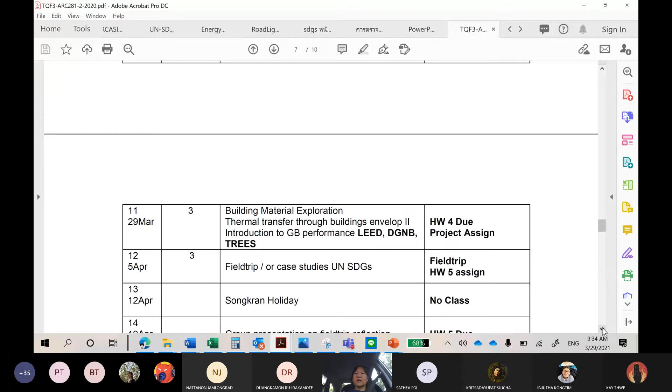Okay, I hope everybody sees my screen. This is the class syllabus for today, March 29. Last week we learned about thermal comfort, thermal performance of building materials, and building properties, as well as thermal transfer through heat gain through the building envelope.

We learned about U value, OTTV, and how it affects building envelope design. We had a quiz last week. I also assigned homework number 4, but the due date is not today. The due date will be April 5th.

Okay, homework 4. I already posted the homework on Microsoft Teams, where everybody is required to attend the webinar on April 3rd, which is your homework number 4. Okay, you have to attend.

The webinar on resilience and sustainable future. You are requested to make a summary as well as give critical reflections, your thoughts on it, what you can use, and your thinking about the webinar and your future. This is homework number 4, which is due on April 5th.

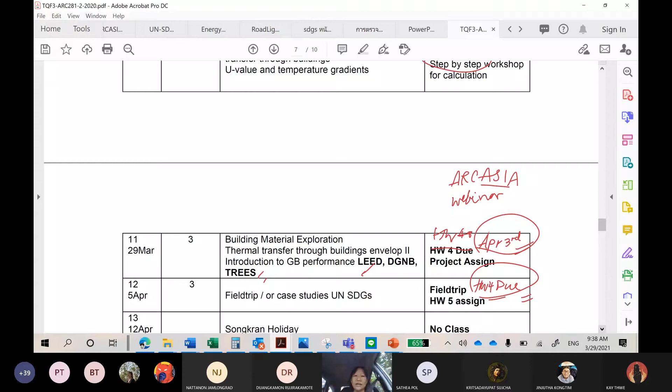Design for function, design for feel and emotion, for aesthetic, as well as design for sustainability and social responsibility.

Okay, first I'm going to have two sets of lecture. The first set is going to be building material, and the second set is going to be about LEED and TREES, where I'll give some case studies so you can see the design approach and the way you can make a presentation.

Okay, hang on just a second. Oh, hello. Excuse me. Sorry, students. Do you still see me? Yes, okay, wait a minute.

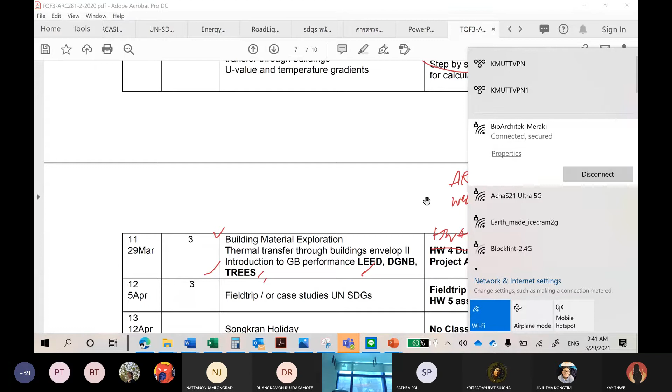All right, building material. I'll show you my lecture. Okay, can everybody see, all right? During my lecture, if you have any questions, please do not hesitate to ask.

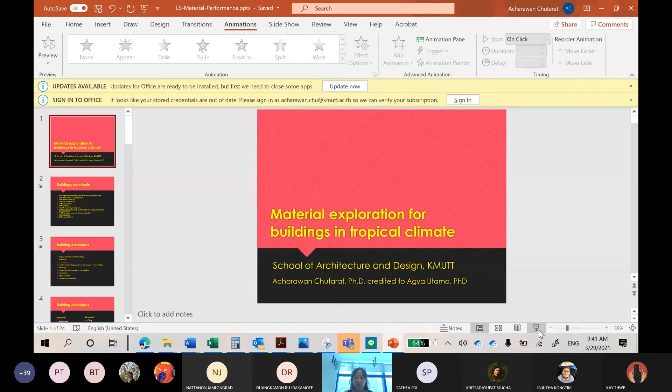Okay, building material for tropical climates. Actually, buildings contribute to the largest raw materials consumers after food production. Every day we have to eat, and that consumes products, and the second is building, because 25% of world's wood harvest is through the building, as well as 20% of fresh water use.

We use water for shower, toilet flush, washing machine, car wash, irrigation for plants. So those take about 20% of fresh water use, and 30% of raw material use, because when we build a building, we have to find the material to make materials for our building envelopes, floors, finishing, ceiling, structural materials—so everything.

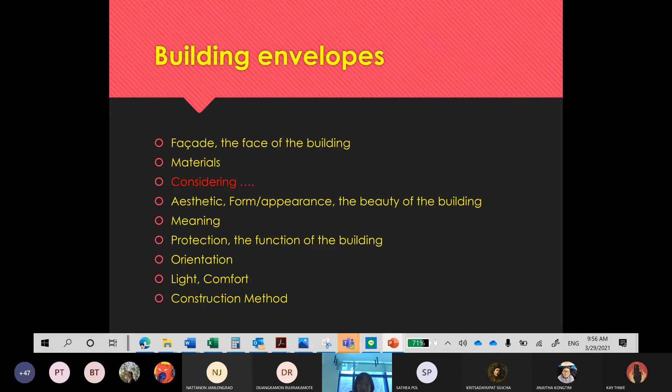So that kind of stuff you have to think about your site and what kind of construction method. Now building envelope - we have to think about what kind of windows, materials, doors, materials, walls, balcony and shade.

Materials can be clay or not. Clay is not good for Nan. Clay may be good for dry climate like Kanchanaburi or Leh, because there's not much rain, and clay or bricks can store the heat onto the... let me sketch this. Clay or thick wall, clay or rammed earth.

Rammed earth is like a layer of mud or brick with layers of cement, and another 10 or 12 centimeter layers of mud or brick, the earth around there, and then you have a kind of layers and press it.

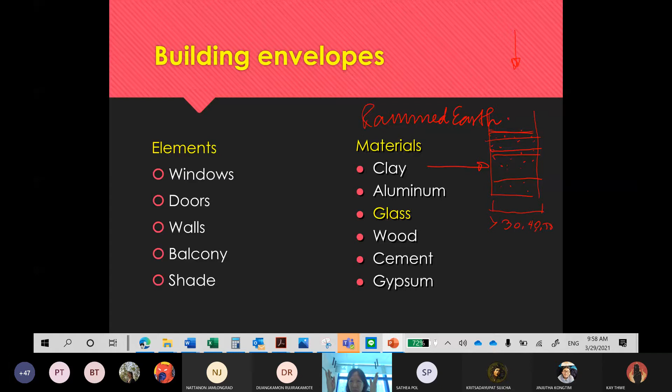That is rammed earth. Basically, rammed earth or clay is like more than 30, 40, 50 centimeters, depends. The thicker the wall is, you can withstand the load like a load bearing, and it can absorb the heat during the daytime. Now the heat comes here and it stores the heat, it delays the heat.

Stores the heat and delays the heat, not to enter into the building. So during the daytime it's cool, when you have a room like a temple or a daytime use, you can use clay or rammed earth.

In dry climate, but why I said it's not good for Nan - because Nan has a lot of rains, and this material absorbs water and sometimes it melts when it rains. And if it doesn't get dried properly, it can have fungus and mold. And when you breathe, it's not so good for your health - very moisture and dirty air, unhealthy air. So that's why I said you need to look at the climate first.

Next is aluminum. Well, aluminum is nice, of course it's durable, it's light, but it looks like a kind of office or a hospital. I don't think it's quite nice for residential or school or somewhere that you need kind of warm and welcome feeling, because the material's property itself is harsh.

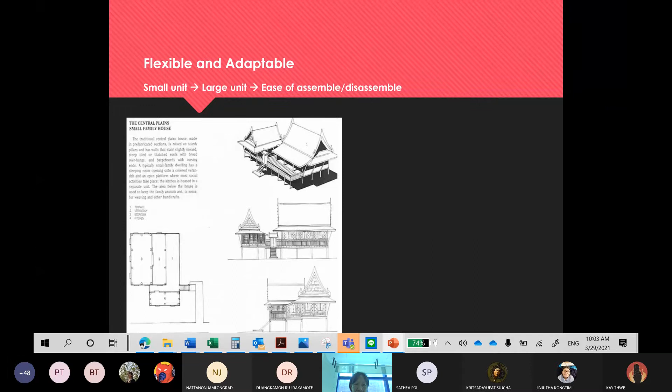So let me take a look at Thai, or our own wisdom. Actually our ancestors were very genius about that. Because why - they could find wood all around, okay, Central Plain, they could cut the wood or bamboo, and then what else?

They can make a design that can grow and is adaptable. For example, if they have only their own unit, number 3, with the sub-terrace and terrace, this is perhaps a kitchen in a separate area. And when they grow, when they have a daughter who gets married, they expand into the big terrace or chan, and they have a kind of connected house. For example, this is the original house, and they can add additional house after additional house. So it's more like a modular design, using the terrace as the connecting and transitional space. Very brilliant design of the living and expanding unit, with a connected system by the chan.

This happened 200 years ago, but I encourage you guys to think about any innovation during our design. Is there any new language?

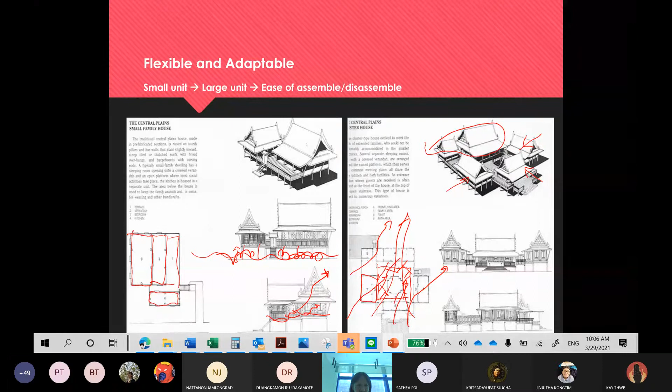So this kind of stuff has been integrated into traditional architecture for more than 300 years. What about our design? Can your design achieve better performance and good aesthetics, utilizing natural resources or passive design?

When they have a long roof, they have what they call kan tuay, a kind of structure in order to hold the roof and protect from the radiation. So you see, this is a very simple and nice innovation.

Let's take a look at the technology. They use what we call a prefabrication technique for each element. Like what? They prefab the column, so one human or two laborers can carry it from a nearby site to put it on the site.

And what about the wall? It's a prefabricated wall system like this. You see, they can make the wall with a light structure, carry it, and then assemble it at the site. It is a light structure. Whether they are on the floodplain or on the hill, they can carry it. There's no steel, no concrete. And with the proper treatment for wood, it can also withstand the termites.

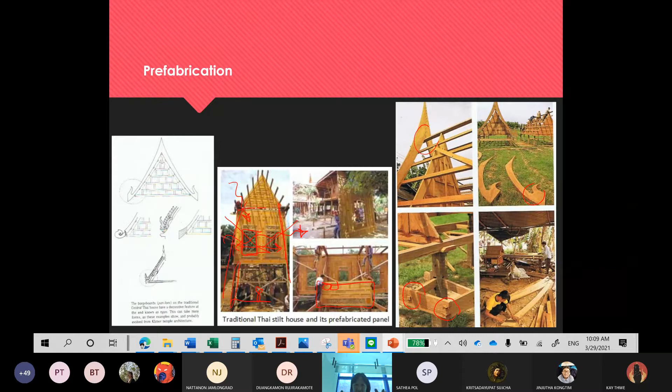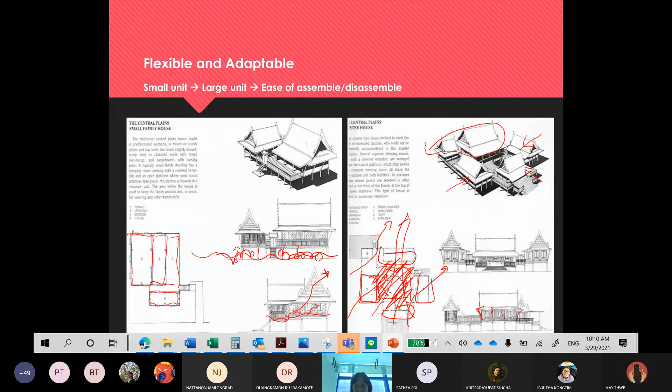So because they think about the pattern, about the proportion, about the shape and line, they create the plane together and create the space. You see, the planes come together to create the inner space like that, without any wall it already creates the space. So think about it, the design of architecture is the design of the space, not really the form.

This is Barai, I put this one for you, it's the way you think about materials and the meaning of the transformation of Thai architecture into modern architecture. This is what we call Barai.

So Barai spa in Hua Hin, when you look you can feel Thainess. What do you see? You see columns, elements, you see the proportion of the opening, the proportion of the windows, and it reminds of course the Thai feeling where you don't have to make a kind of steeper roof like that.

And the lighting fixture on the corridor, they put light on the ground in order to create the peacefulness and silent space when people enter, like when they enter to the temple, with the high steep roof and big form and light on the ground it keeps us peaceful and quiet. It's just like the feel when you enter the temple, the space is huge and it makes us small and respectful, peaceful.

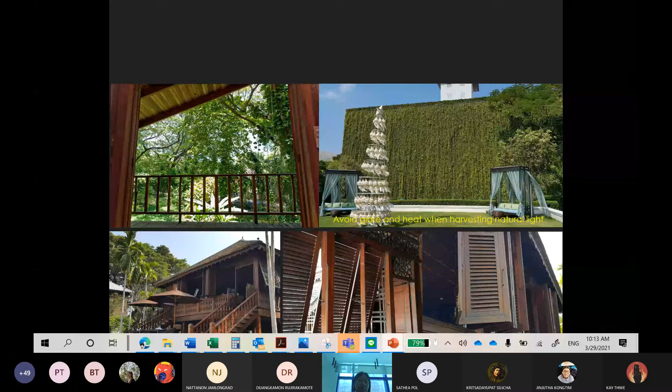This is 137 Pillars House in Chiang Mai. My friend owns this hotel, Khun Noi. And the designer for this hotel is also my friend, Khun Pui, from P-Land. My friend, she is a nice landscape designer and she has the background in architecture.

So this is the old house, abandoned, and they preserved the wood for more than 100 years by kind of varnishing with oil, black color of oil, and it preserved the wood nicely.

And so they come, and it's teak wood, you know teak wood. You can cut the teak after it's around 40 years, even 50 years, they can cut the teak wood because then the teak is old enough to have a kind of chemical that the termite doesn't like.

And so we can do that and it's hard, the wood is hard. So this kind of opening can protect from the rain and allow some natural ventilation, filtering light, and you see a lot of trees.

Instead, if this is a white wall, it's no good. Okay, so we use trees in order to filter light, to reduce what we call glare, too bright. So many times in Thai architecture in tropical climate, the sky is bright. Therefore we need kind of filtering light by either facade design or green design like this.

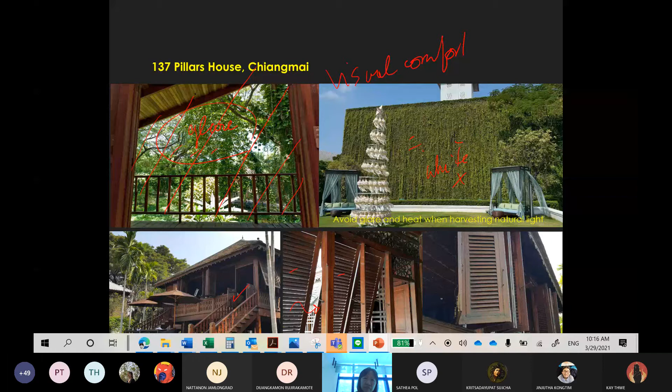And also to protect the heat, by facade design, facade and landscape together, to make very nice ambient temperature, nice visual perception in everything. So architects, I would like you guys not only to think about the building alone, you have to think about landscape design and think about the climate as well. Landscape is important.

What's another material, typology of material? This one I got from Ajarn Boonserm Premthada, he is the young national artist. He tried to look at the language of Thai architecture that plays with brick, and this is the brick from an oven, the brick oven in Ang Thong.

Even brick in the temples. When there's a brick, it's associated with the sound and with the feeling of coolness, and the echo sounds a little bit, and the proportion like this. Therefore, when we create the architecture in Thai, we could have quite narrow and long and large walls. So when you walk, you hear a little bit of echo. Oh, it sounds so sacred, very focused.

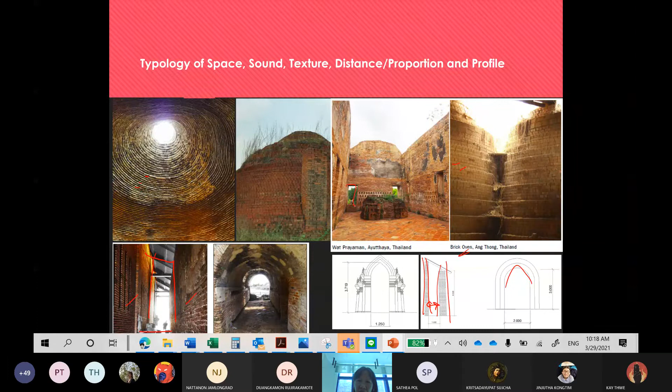So the play with the brick and the structure of the oven becomes the inspiration in many of the design language of Ajarn Boonserm Premthada, like this proportion, the thickness of the wall, how it must be narrow and tall, and the curve like this. So it's not from the West, this is derived from the old wisdom of Thai design, even the proportion of the window is quite long, this is tropical.

The innovation from learning from the past is that at Kantana Film he tried to create quite a narrow wall, but the proportion outside is still the same. He also put the landscape in order to protect from radiation, so when you walk here you don't get the sun at all, you get the shade, and when the sun comes this way it gets blocked by the brick wall. It's not totally a solid brick wall, he has a kind of steel structure inside, and a structure detail in order to hold the brick.

Because of this, the unusual tapered shape reduces the echo and also creates the texture, it creates a kind of dark and light effect.

When it rains it becomes mossy, like a kind of greenish color, and it feels good. So that it can keep some moisture, this is the intention of the architect.

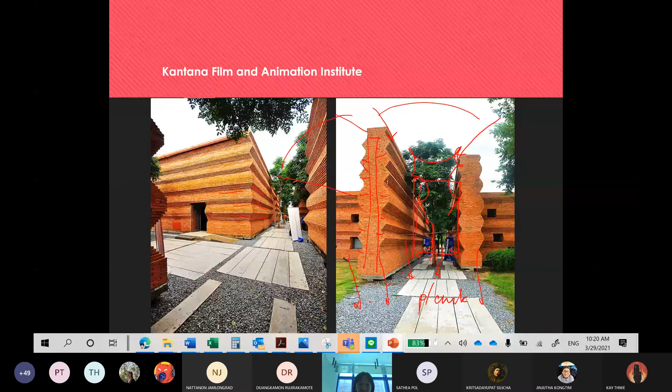And you see the landscape, they use concrete plank so that it's quite flexible and the water can seep into the ground. See this is the stone so that the water can seep into the ground and they can reduce the flood.

This is how it looks, it's quite pleasant. And you see the window is set in so that it can protect from the radiation of the sun, the window is small and set back into the wall section.

At Phuket, this is another feeling, this is also a residential hotel. The feeling that they want is kind of Chino Portuguese, but this is a hotel, so they don't want it to look like a temple. Sala Phuket is in the south, Chino Portuguese style is from the south. What kind of mood can we create? They create a fluffy, relaxed mood, and they utilize fluffy colors like gray, white, and a kind of bluish gray, because it's next to the ocean, so this kind of color creates diffuse light and quite comfortable materials.

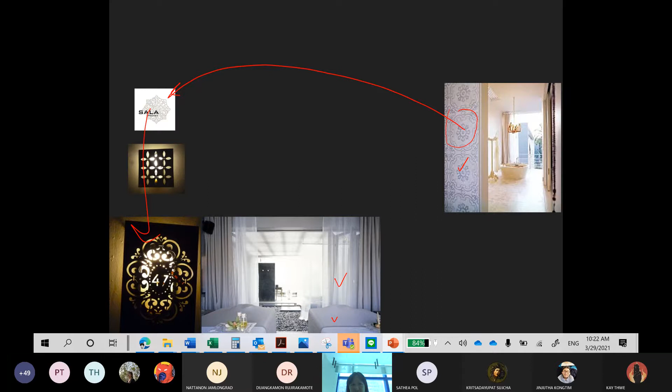And also they use kinds of patterns that can give the accent of Chino Portuguese through the pattern of the floors, walls, and even lighting design technique. Even the lighting, they use transparent elements so that they can feel the transparency of the water.

And this one is the spa, like I said, the lighting from below will give you quite peacefulness, and light without smoke, you don't see it. The landscape designer injects a kind of fog as a design in the landscape, because when the light hits the fog it reflects the effect, so that we can see the effect with our eyes.

So this is the design, the reason why they have the wall like this is concrete wall, but bare concrete, no plaster, because they want people to feel raw, feel no fake openness. You see they use wood, they use raw concrete wall.

Wood, so that they can feel, and then water and stone, so that they can feel raw, they can feel friendly and down to the earth, because people want to relax, not aluminum cladding, they want to feel relaxed, and not marble, I think that's a different mood.

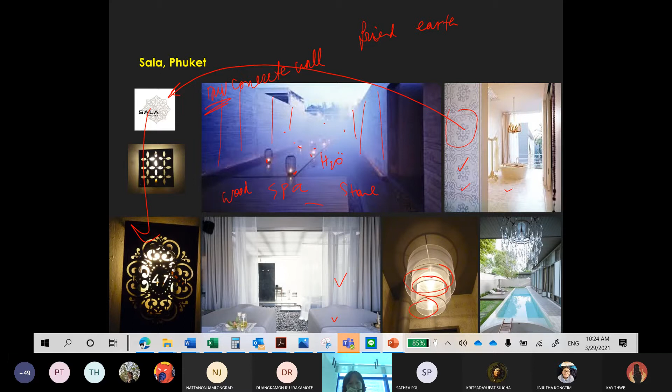Again, they want people to feel relaxed because it's a resort next to the ocean, therefore instead of marble they use just ceramic tile but in Chino Portuguese style, and raw concrete and wood, and so on. So I hope you get a sense of how to use raw concrete, not for the room, this is just for decoration, because the concrete wall...

It stores the heat and you don't want that heat into the room. So you see a lot of windows for natural ventilation. This resort has a very small area, and this is a service area next to the spa, so they have to create their own view into the architecture - they create a wall and create their own view into the living room. Otherwise they could even create a green wall here, because otherwise they would see each other. This way, they can feel the space is long and open.

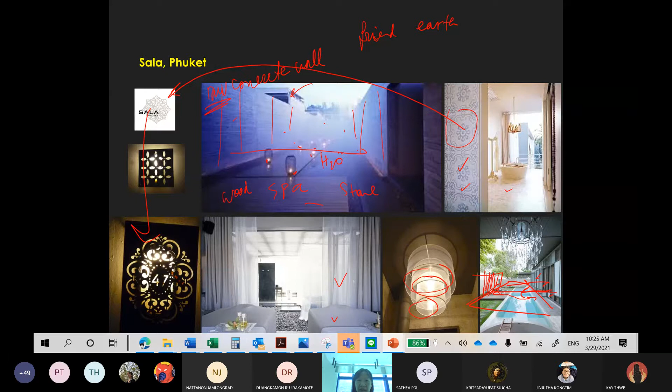This is how you want to think about the materials, now the life cycle of buildings. Embodied energy, like I said, is the energy required to produce the material. What does producing include? It means production, transportation, quarry activity, and construction - these are all what we call embodied energy.

Why do we want to think about that? Because this process emits CO2. We want to select the building material that has as little embodied energy as possible.

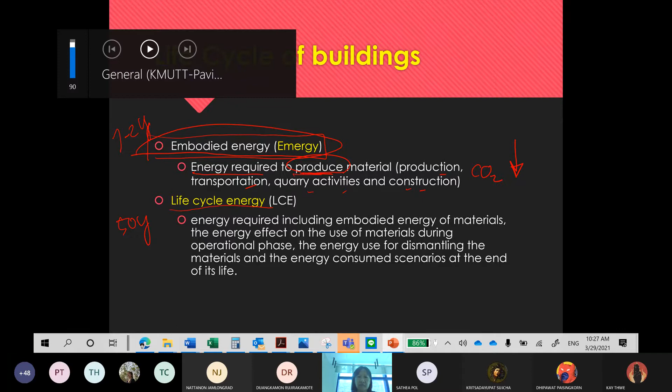The next thing we need to think about is life cycle energy. This one-time embodied energy happens at the beginning, maybe over 1 to 2 years, while life cycle energy spans 50 years. Life cycle energy is the energy required during operations, like energy for air conditioning or heating, and cleaning, and energy for dismantling, something like that.

So when we want to specify a material for a building, you don't think about short term cost - you have to think about long term, the overall cost of material plus the life cycle cost. At the end of the project's life, whatever it is - 20, 30, or 50 years - you have to see in the long term which option benefits the owners or users of the building more. Let me give you an example.

When we want to specify a kind of glass for one building, glass option A costs 10 baht, and glass option B costs 20 baht. It looks like glass A is a good choice, but that's only for the short term. We have to look at the SC value and U value - how much heat gain goes into the building, and how that costs for the air conditioning system, in baht or US dollars, over 50 years.

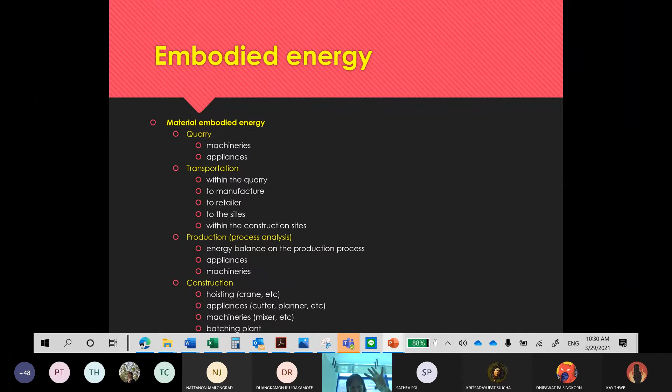Why do I say that? There are many researchers who have already done research on that - on embodied energy, like machinery and appliances used to get the material from the mountain or forest, and transport, production, and construction.

So for timber, we have to get it from sustainable sources, not from someone who just cuts trees from our mountains. We need to preserve the mountains and the trees. Of course we want the rivers to still have water. But many times they cut trees for building materials, and also for food - for potatoes or corn, for animal feed. They cut trees to grow these crops, and then less water can be kept in the mountains, and less water is available for us to use in the city or for agriculture.

So we need to be careful - try to use reused, recycled material or certified wood, otherwise we'll have no water in the river like what we are facing at the moment. The government is trying to warn everybody to save water. Why? Because one reason is we cut trees for construction, we cut trees for crops, especially corn and potatoes for animal feed, even cutting trees for diesel or for palm oil production. We have to balance this, otherwise we'll have no water and no food.

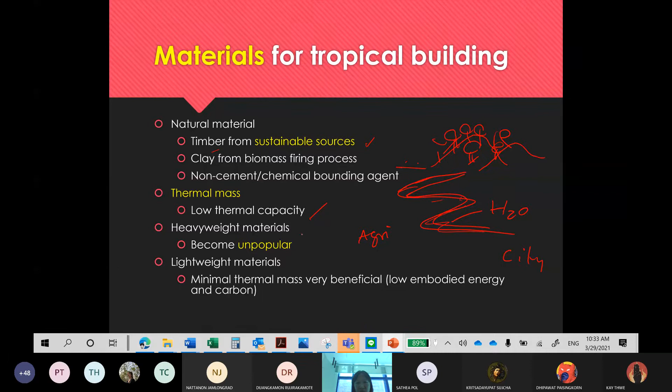Thermal mass, we should use low thermal mass, not heavy mass, lightweight material is good for us. For building envelope, thermal mass is important, we should use light to medium thermal mass, but heavy mass maybe for daytime use like temples, not nighttime use, because otherwise the heat from the wall will come to your room during nighttime, affecting human comfort and energy saving.

For building envelope, try not to paint the building black, because when you paint it black it absorbs a lot of heat and you get high temperature on the wall. Try to use light material, light color, otherwise when it absorbs heat it will come into your room easily. For the structure, try to use light material as much as possible. If you use heavy structure, it means you have to use a lot of sheet pilings and foundation, it's not sustainable, you use a lot of material for that.

And try to reduce the lift or elevator use. Of course we design very nice steps or stairs to encourage people to walk on the stairs instead of using elevators, for example. Alright, that is about building and materials.

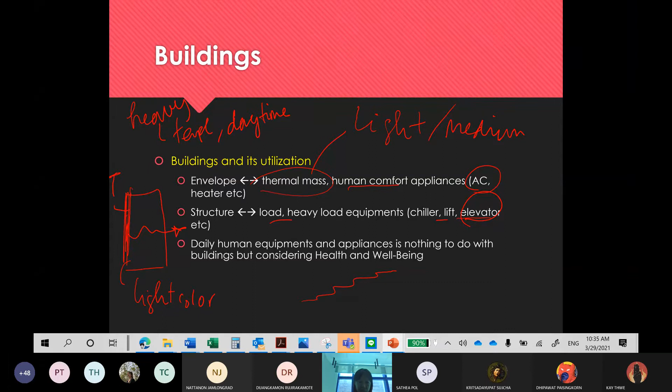You try to use something good for health and well-being, like wood, which is light. Wood is light because its embodied energy is very low. Brick is the second lowest, but brick transmits water or vapor, it's quite moist in the building, and it's not good for air conditioning, because when we have moisture transfer into the building it means a lot of air conditioning load.

Because air conditioning or refrigeration functions to reduce temperature, and another is to reduce relative humidity. So this air conditioning load must be reduced - if you have brick you have to have a water vapor barrier in order to prevent water transfer into the materials. Heavyweight is no good, lightweight is sometimes okay.

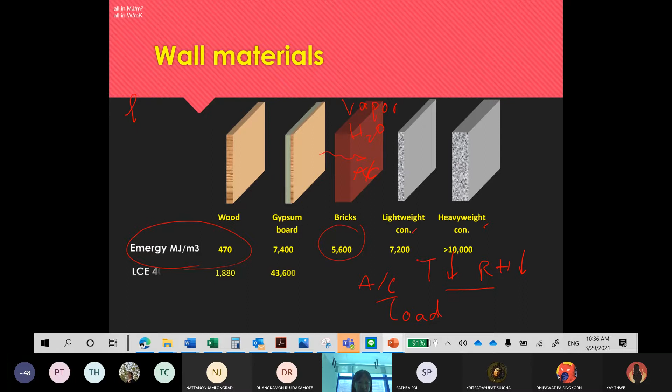Alright, windows - like I said, of course double glass uses a lot of embodied energy, but somehow you need to look at the long run, if the energy used in the building could be less. Life cycle energy is much less than single glass.

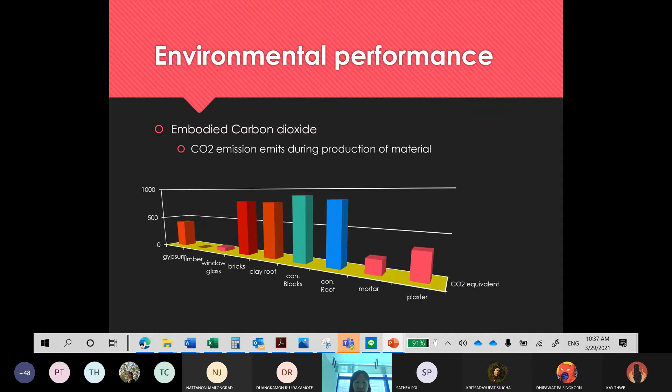Embodied energy - if you use a lot of energy to produce, you see timber creates less CO2 emission, or no CO2 emission. Bricks have to be burned and it generates CO2. Clay, concrete blocks a lot, concrete roof a lot, mortar some - so try to use gypsum or timber as much as possible.

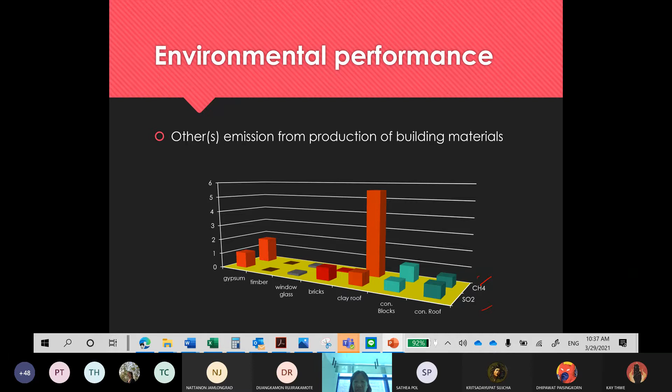Another emission is methane gas and some others - okay I'll go faster because it's 10:30 already. Methane gas, clay has a lot of methane gas.

Materials must be durable, last long. Material should come from renewable resources, can be reused again - steel we can reuse again. We can recycle, we can do wood, glass many times is also recycled - most of the glass surrounding us has 30% recycled content.

Choose manufacturers with environmental savvy, avoid toxic components like lead, no or low VOC, something like that, no toxic paints.

Avoid hazardous materials like lead, fiber and vinyl flooring. Waste to energy - sometimes waste, you can consider burning the waste in order to produce heat for energy production. Waste to construction, and also plastic bags - they can make diesel oil from plastic waste or bags as well.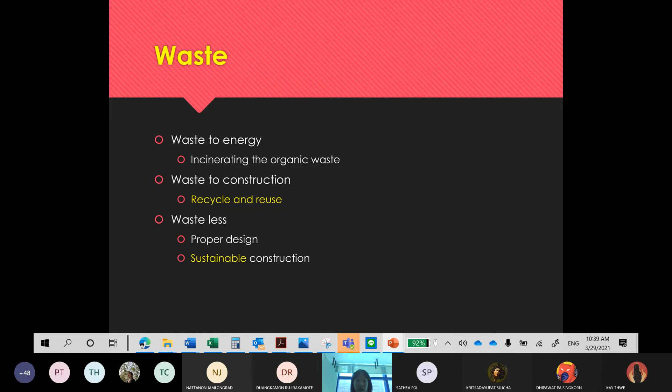Waste to energy, waste to construction - you can design construction waste into furniture or decorative items, into the building or railing, like steel bar leftovers - you can design the balcony or some kind of decorative item from that. Waste less. Proper design for sustainable construction by modular design, prefabrication.

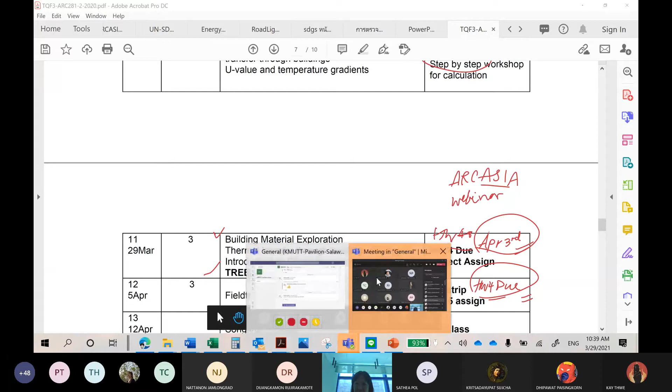Any questions on that? Any question on that, students? If no question, maybe I ask - oh I forgot to download the attendance list. Okay, may I ask Chinnakrit, what is embodied energy?

Okay, I realize that when we turn on, but students are not there. Chinnakrit is not there, let me make a note.

I'm here, teacher. What happened to you? I didn't turn on the microphone. Okay, what is embodied energy, Chinnakrit?

I think it is the energy used to produce the material for construction. Okay, partially true, but it's not only produced—it's also to quarry and to transport. Produce, transport, and build the building.

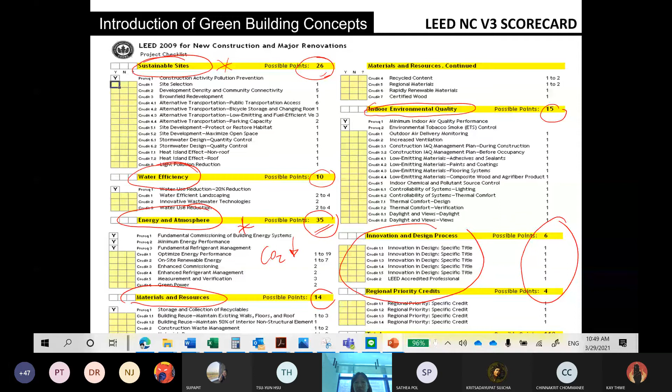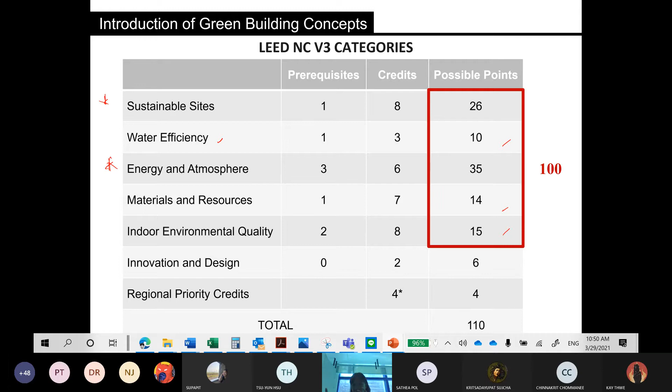Let me talk a little bit more on this. You see sustainable site, energy and atmosphere is the most important, site is the second. Third, you have to think about material and good quality for your life and reduce water. But in Singapore, they give priority to water efficiency because they lack water resources. So they give more points if the architect can collect rain or recycle water, something like that.

So let me recap. There are six different items: this one is more important, this one is equally important, and this is the third priority.

Now let's take a look at the site. Sustainable site - how are we going to design for green building? Like I said, we need to look at landscape. You have to look at the surrounding analysis too, not only in the site. Site means including the surrounding as well.

Mandatory is to control construction activity pollution prevention, meaning that when we build a building, we have to prevent the dust, the wastewater release into the public pipe, and reduce noise disturbance. This is mandatory.

Site selection, 1 point: you have to select a site near connectivity, meaning community and density, not to build a house in a remote area. When you build a house very far away unnecessarily, the town has to build a road for you, build the water pipe and electricity line for you. That is not sustainable. We should select the site, if possible, where the community is, where the development is, near banking, schools, or near public facilities.

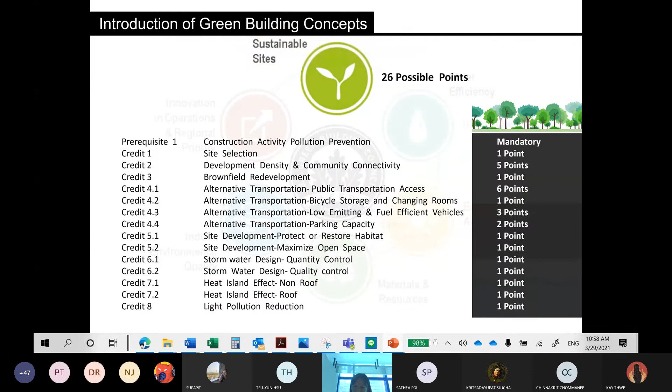Second is water efficiency - water use reduction. Water efficient landscaping means you select local plants that use less water.

You design the water system, like a dripping system for the landscape, or have a pond to collect rainfall for irrigation of the landscape. You get four points for this. It must be designed into the site like this.

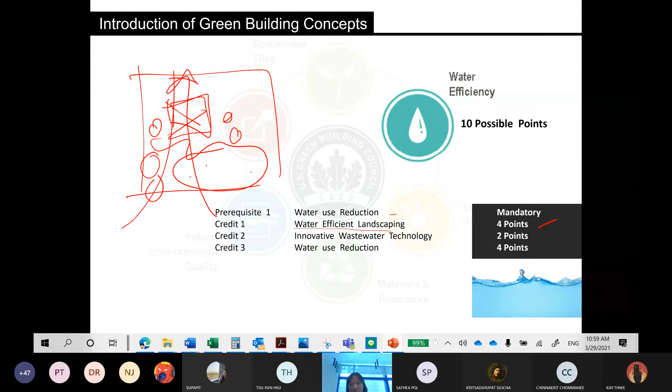This is the house - you collect the rainwater, and then you have the pond here, something like that. Then you have the water to induce the wind, and the trees to induce it as well - water reduction, water efficient landscaping.

You specify local plants, you specify the pond size in square meters in order to provide enough water for the plants. You must know how much water is needed for the plants, so you should keep this in mind in order to provide enough water.

For example, innovative wastewater technology - how are you thinking about treating the rainwater by plants before it comes into the pond?

You can call it a bioswale, to treat the water by collecting the rain from here and then stepping it down, putting in plants that can treat the water before it comes to the pond. For example, water use reduction, like using water-saving equipment.

Something like that - that's water.

Next is important - this is energy and atmosphere. Optimize energy performance means you optimize for a good building envelope.

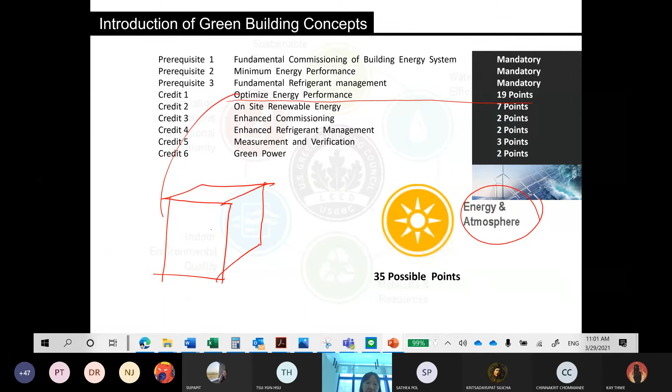What is the wall OTTV, maybe with shading? Optimize for the shade - what is the shading coefficient? What is the roof RTTV? You must have the lowest value possible, so this is optimizing energy performance.

If you have this process, you get 19 points. So for this you can use Cove.tool to do the optimize energy performance.

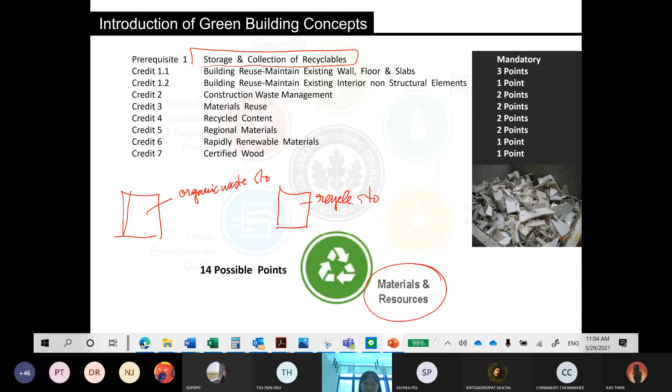Recycled material storage - here you have to divide it into maybe paper, maybe plastic, maybe aluminum, glass, and then doors.

Organic waste is not much, but many times you should have air conditioning to prevent the spoiling of the organic waste like food waste, and then you should have another storage, what we call general waste.

Meaning that you cannot recycle or it's not food, like a plastic bag. So general waste, like a wooden stick from grilled squid, or from the beef ball, that kind of thing is general waste. It cannot be reused or recycled, so you must have this as a mandatory consideration in the building design.

If you are renovating and you use existing walls, floors and slab, you get 3 points, meaning that you don't destroy the wall, floor and slab. For example, if you keep the same structure, same wall, you get more points.

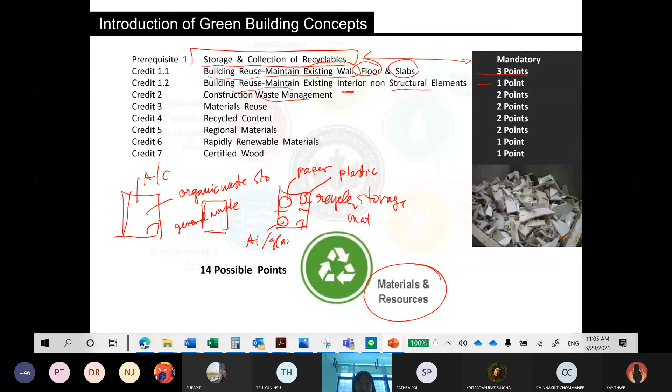If you use, remain and maintain existing interior non-structural elements, you get 1 more point. And if you have construction waste management, meaning that you think about how to use materials that produce less waste, modular materials, reuse, or prefabrication to have less waste, you get 2 points.

Material reuse - like instead of breaking windows, you save the old window and put it somewhere, meaning that you reuse the material.

If the material has recycled content, like maybe artificial wood, and in the artificial wood you have recycled wood content in there, you get more points.

Regional materials or local materials, available locally and not imported, you get more points. Something like that - rapidly renewable material, certified wood like I said, you get 1 point. So this is the materials and resources that you should think about and specify into your design.

Any questions on materials and resources?

Next is indoor environmental quality. How can an architect design good indoor environmental quality? Of course, first is minimum indoor air quality performance. This is mandatory by law and regulations, like in a room you must have ventilation - fans, ventilations, minimum performance required by law.

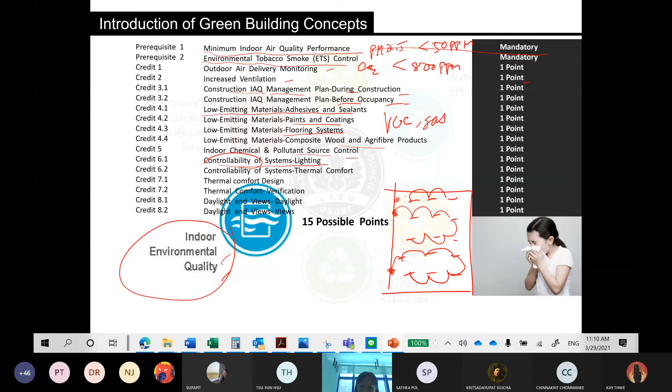Controllability of system lighting, meaning that when we have a room, we have the lighting circuit - not just one switch to turn it all on. You have to have controllability, meaning if you sit in the back you have a different circuit for lighting, for example, or the front can control brightness when we turn on a projector, like you can see in the front of the classroom. That is controllability - you must have different circuits like that to get one more point.

Same for thermal comfort, like air conditioning - you must be able to control different zones and design for good comfort, not too hot, not too cold, not too humid, something like that. And have comfort verification, meaning monitoring, and have good daylight and view. If you have more view, you get more points, something like that.

That is when you have view, you have good environmental quality. Make sure that most of the rooms in your design have the view and daylight, not the heat. That is indoor environmental quality. Any questions on indoor environmental quality?

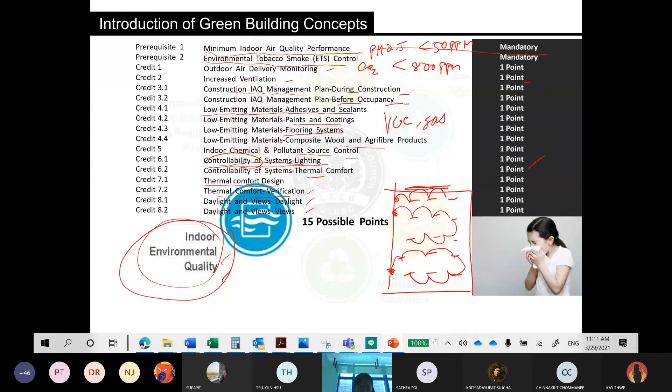Okay, this is innovation. If you have any innovative design, like light pipe, light shelf, design of skylight without heat, those can count as innovation. Regional priority is something urgent, something important regionally, like design for flood. Innovation, like different location, you get more points.

Now that I finished LEED, this is the USGBC. Now I want to talk about TREES - the Thai's Rating of Energy and Environmental Sustainability. TREES, NC stands for New Construction. This stands for TGBI, which stands for Thai Green Building Institute, which I am also a committee member of.

I know that the committee who developed TREES looked at LEED for inspiration. So many times in TGBI's TREES we look at LEED. So when you look at it, it's quite similar - we have Silver, Gold, and Platinum.

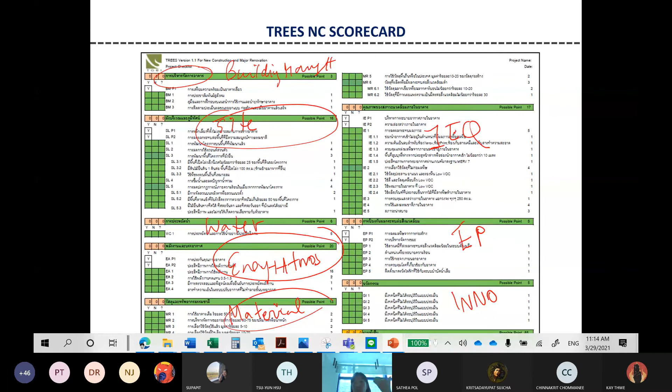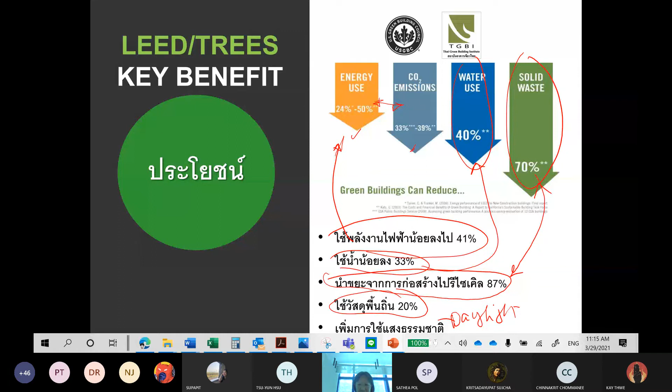So that is the benefit of why not doing green building, because we want to have a better environment, to preserve water as much as possible, to reduce greenhouse gases and the global warming effect. So everyone, your design and your specification does matter. All this you can read more on your own now.

Okay, to give you an overall example - this is EGAT, Electricity Generating Authority of Thailand's headquarters. They have green building techniques. They have low-E glass, high performance glass, and they have shading devices.

And they have the core of the building on the west in order to be a buffer zone. This is shade. And they have high performance air conditioning systems.

Don't worry, next week I will have air conditioning experts give you an overview of the air system, a simple air system in the building.

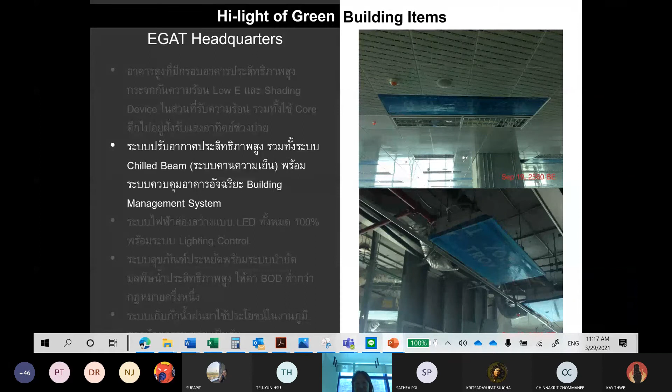Moving on with air conditioning - they use LED lighting, a very energy efficient lighting system with lighting controls, meaning with sensors for daylight and also with sensors for occupants.

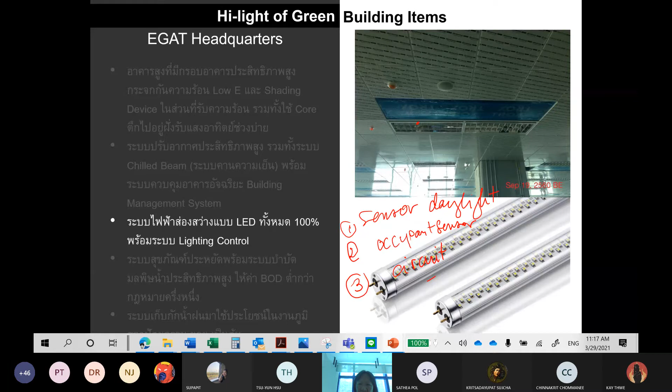Third, they have different circuit designs. Like the building, this is the core of the building circuit design, meaning they have lighting along the perimeter with light sensors, and then one circuit along the perimeter, and they have the inner one as the second and third circuiting. So they design the circuit according to the zone and the usage as well.

And they use, of course, energy efficient equipment - for example for the toilet, they use dual flush toilets.

3.63 liters per flush which is very efficient, and this is for the man urinal flush, 2.25 liters. So those are the details, you can ask the manufacturer to check what kind of water use per minute or per flush.

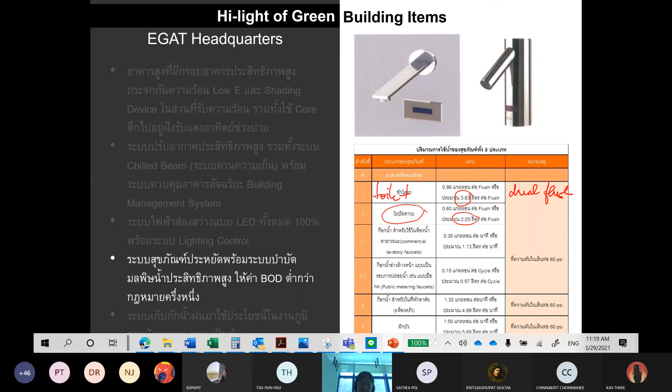And they use good water treatment, and they collect the rainwater into the landscape. So those are highlighted, and again the next building, they also use low E and face the building to the west.

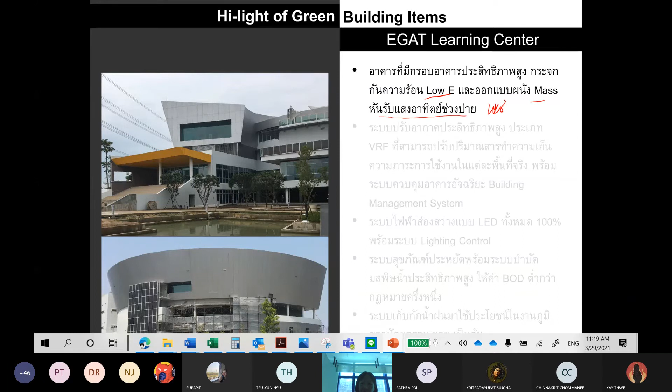Like this, the building has no windows on the west, and they use VRF, a very high efficiency air conditioning system, efficient LED system, water efficiency equipment, and designed to collect rainwater onto the green roof, and also collect rainwater into a reservoir, like that.

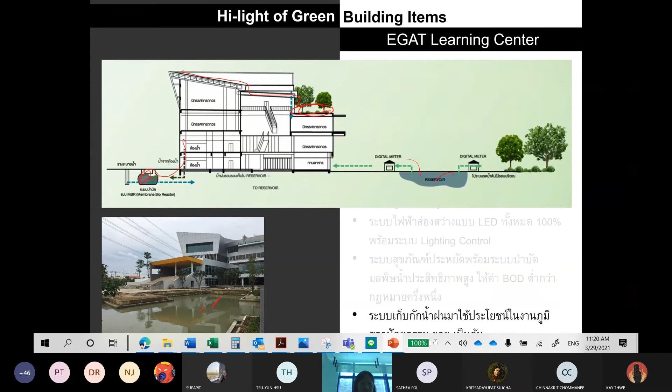And they also, this is the water collection. They use the water from the toilet in order to treat it using a membrane bioreactor, and the water that comes out is very clean.

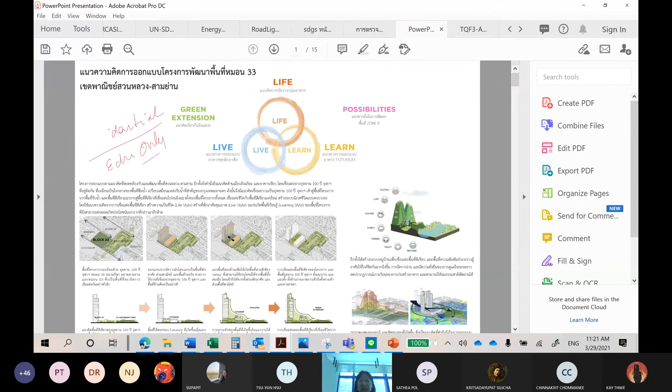That is for this list, and I wanted to show you one more project before we leave, which is very good, that I wanted to show you from A49. This is confidential, you cannot share it, it's for education only. I must credit A49 company.

So this is the condominium in Chulalongkorn University where they designed the building thinking about green design.

And they have the concept that they want to have life, not just a condominium to live in, but they want to have a life and learn area in what we call the living complex. Because these days, building design has to think about people's behavior and the concept of an ecosystem for living, not living alone - we have to have life and learn together.

This is the site, which we call Block 33, and next to the site is Chula Centennial Park, a 100-year public park. So the designer would like to design the condominium here, and the learning and the park here, so that there is continuity of the park, the learning and the living - public, semi-public and private zoning.

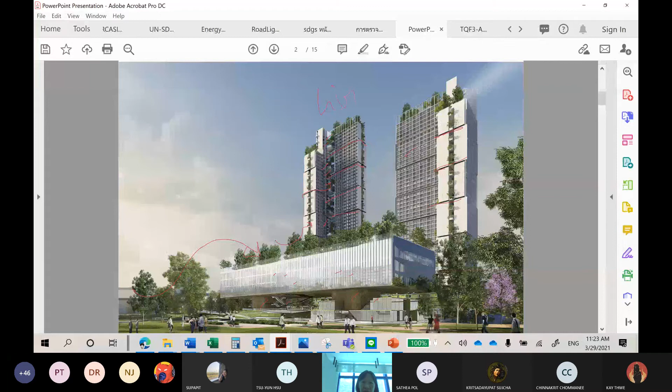The designer wants to have continuous green onto the green roof, then vertical green onto each mechanical floor, and also some ventilation on the common area to provide comfort. This is called Futurium Learn, which is a complex like a food and learning area for the students, and this is the living headquarters - this is living, this is the learning complex, Futurium.

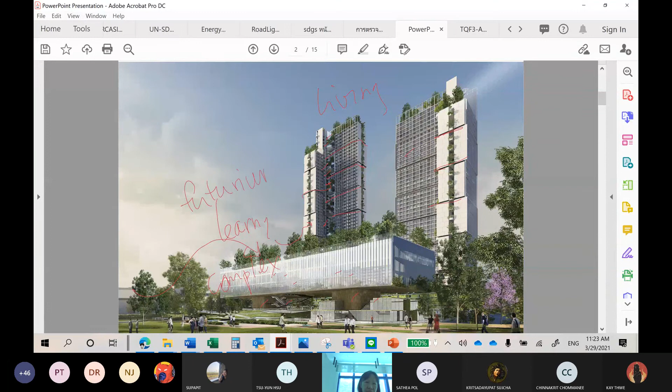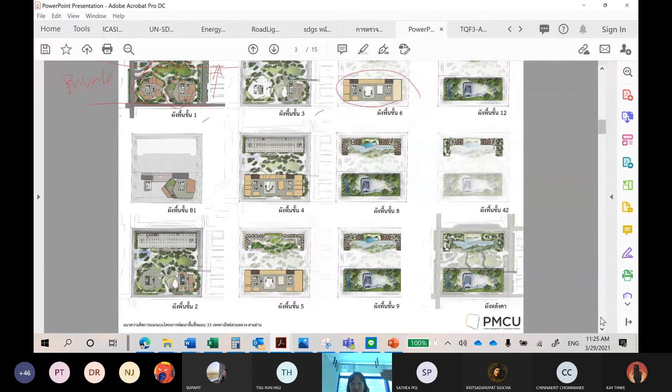For residential, let me move on - you see at all levels they have green area instead of putting solar cells, because they want to leave nice urban green, integrated, because they don't have much land area, so they have to use both horizontal and vertical green into the design. Let's take a look at the plan.

You see they put a common area which is open green space, and they open it for ventilation. So this one we call double loaded corridor, because they want very high efficiency in the building.

And if we look at the plan here, of course they want to provide the view for living and bedroom, and the toilet is on the corridor side, and you see that they need to provide duct space so that they can do maintenance from outside. And the door - when you open it coming in, you see the nice view and open space, dining and living area.

This is the duct, I think for ventilation and for the mechanical - they need ventilation for the bed, for the toilet, to get dry, and this is for the living room, for the bedroom, so like that.

You see they have to mirror the layout so that the duct can be shared between this unit and this unit. You see the toilet is next to the open space for ventilation, and for the duct - this one is for natural ventilation - so for the bedroom number...

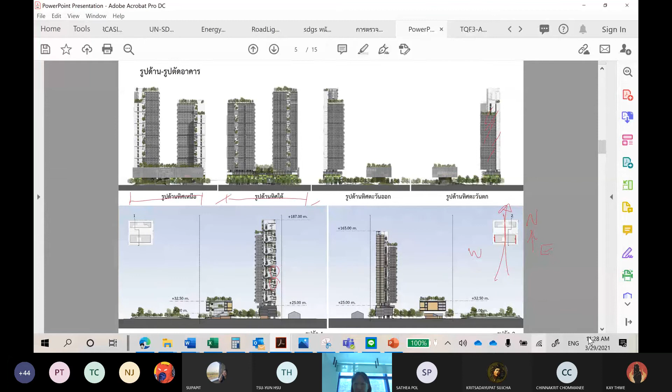Okay, like that. And each room, some rooms have in the section a double layer for trees and for ventilation, as you can see, okay, like that.

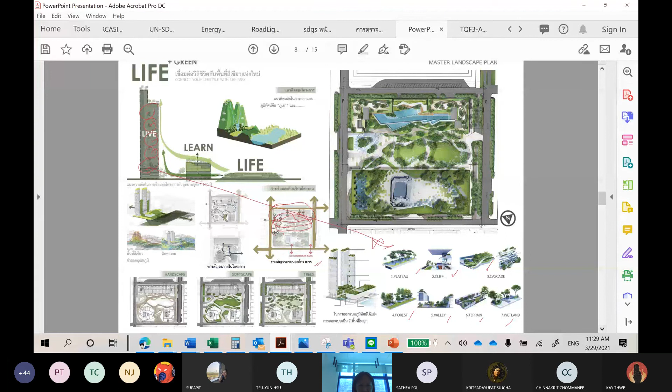But besides that, they need to think about circulation. Therefore, the parking is in the front, and there is an entrance for the public and for the private, like that.

So you see, they design the lobby. When they enter the lobby, there is a different theme. There's like a cave with a waterfall, a cave with stone, so each different design is still interesting, and double height

for good ventilation, for example, and students can spend time in the green common area so that they can make friends, they don't stay at home separately, so there is a community.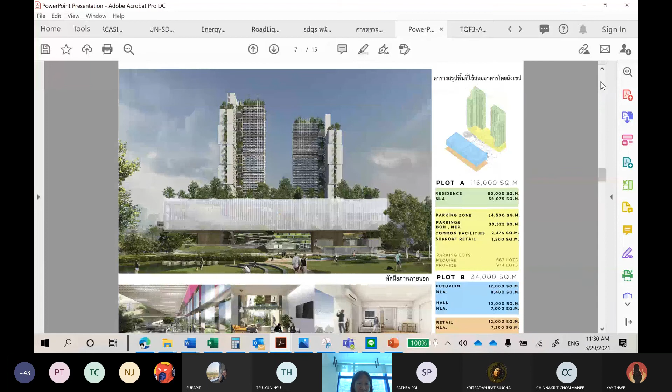Like I want you to take a look here. You see, in different plans, they have this green common area for them, so natural ventilation, very cool and ambient, so it saves energy. Instead of turning on air conditioning in each unit, they can go to shared space in between here. Okay, with good design, students will use it, like that.

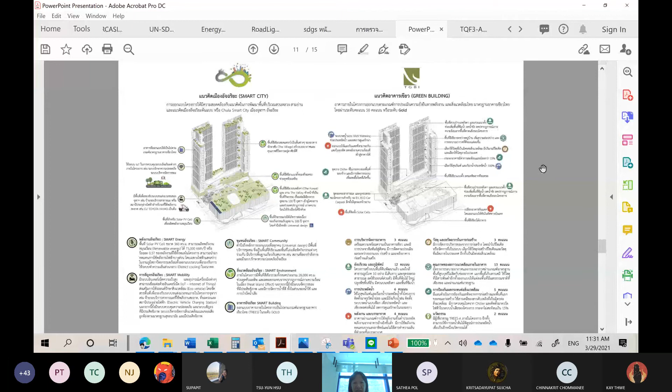And this is for the smart city, because this is the concept for smart city, where Chulalongkorn has the concept to become a smart city, which for example they have to have smart waste management, smart transportation for parking and applications to call cars, smart transportation by solar cell and EV cars, for example.

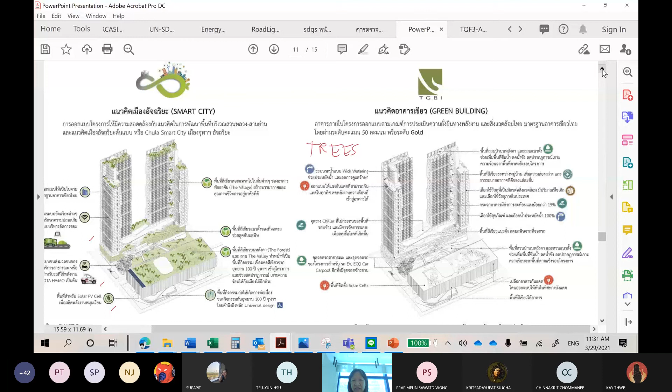And the green area, so this one they have to certify for Thai green building. So these are the design techniques in order to achieve the green building certification.

First, they have wick watering, like a dripping system for the water, and they have the shading device in order to protect against solar radiation. This is the shading device, and I hope to see the shading device in your design as well.

And they have the green roof here in order to collect rainwater and reduce the heat island effect. And they have the green area in between, they call it village, for natural ventilation and for light.

They use recycled material and local materials. They use glass that has reflectance less than 15%. Okay, this is the point.

The law and regulation say the glass reflection has to be less than 30%. But for green building, it must be less than 15% for green building.

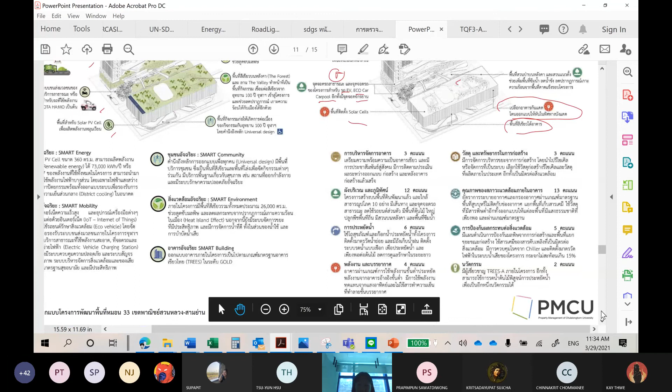Besides that, they use the psychrometric chart and wind analysis to see wind direction and sun location, and they run analysis on heat falling onto the building as well as wind ventilation analysis. I hope you will be able to do this.

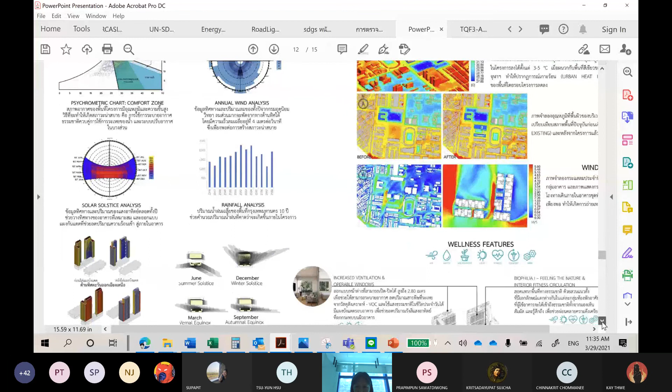Using Cove.tool software in order to support your design for your second studio, second year studio, shading analysis - how much it can protect from heat and still allow light into the building.

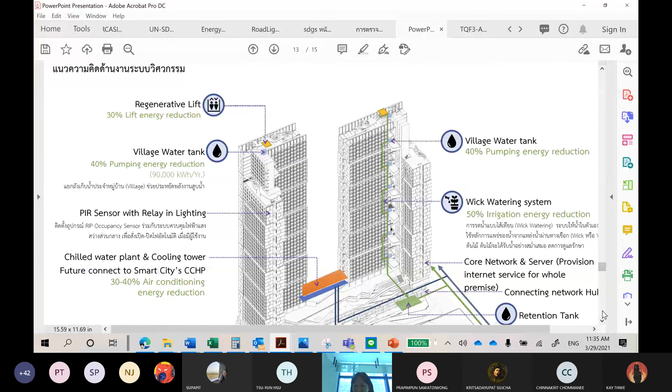That is the concept of green design. This is more engineering - you can read into the details. This is the engineering technique of how they use a retention tank, and where the tank is. You see in each floor they have the village water tank, like that, in order to put the local pump for the irrigation system.

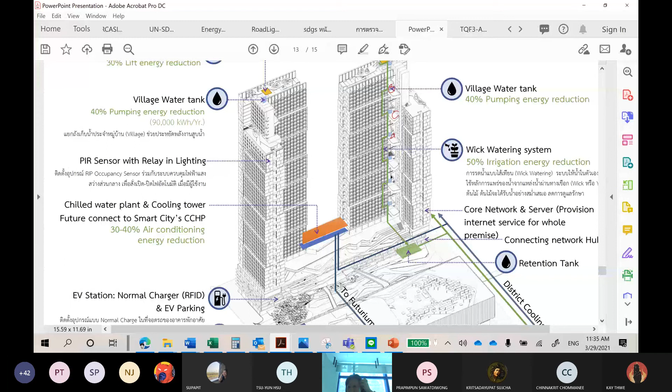You have to think about that in the architectural design. As I said, there is a mechanical room every 10 floors, mechanical rooms in order to put the tank and the pump.

This one, in the section, they have the water tank - the big water tank on the ground from the city. They have the water tank on the ground, and then the pumping station pumps to keep the water here. They keep the water here and then let it come down, fed by either pump or gravity, to feed these floors - this one feeding this floor, for example, because there are trees here.

So the water is just enough to provide for the trees. Something like that.

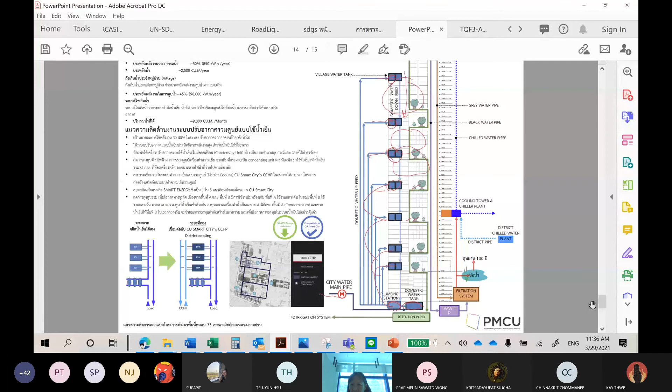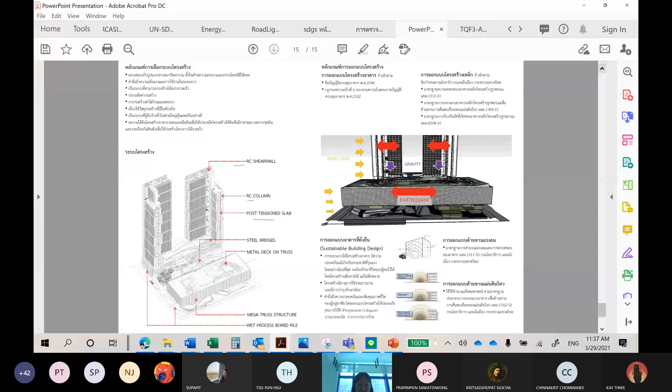They make a truss structure here with a shear wall - let me show you where the shear wall is on the plan. I'll show you here - this is the shear wall, right here. Without columns, shear walls for the elevator, for the stairs.

That is the shear wall, and they hidden the column in the walls too - no wait, this shear wall has no column, they use shear wall. They use shear walls going straight down, instead of columns they use shear wall, so that they can reduce [the structure].

I think it's a clever design. Otherwise, when you have columns like this, wall like this - is this wall interior? No - and then later on the interior has to put another brick wall in order to keep the straight line for a nice look. It's not very energy efficient.

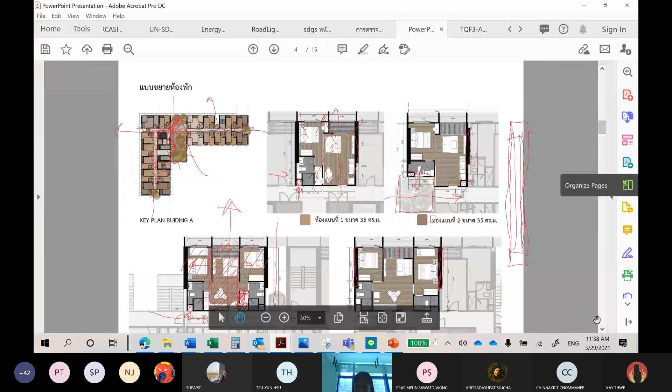So therefore the engineering design has a shear wall right here, a very very thin and long column, in order to withstand the load and the wind load - something like that.